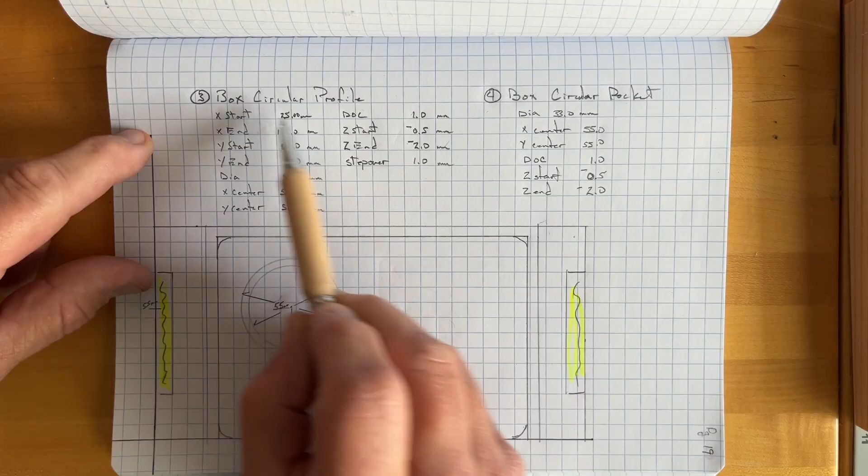All right, so we've knocked out a few things. We've done our profile all the way around it, and we've done our circular pocket. Now what we need to do is work on our rectangular pocket.

So we're going to set this up at 50 millimeters across, right? Our set point or center point will be at 115 mils and at 51 mils up, so it's just a little bit lower in terms of center.

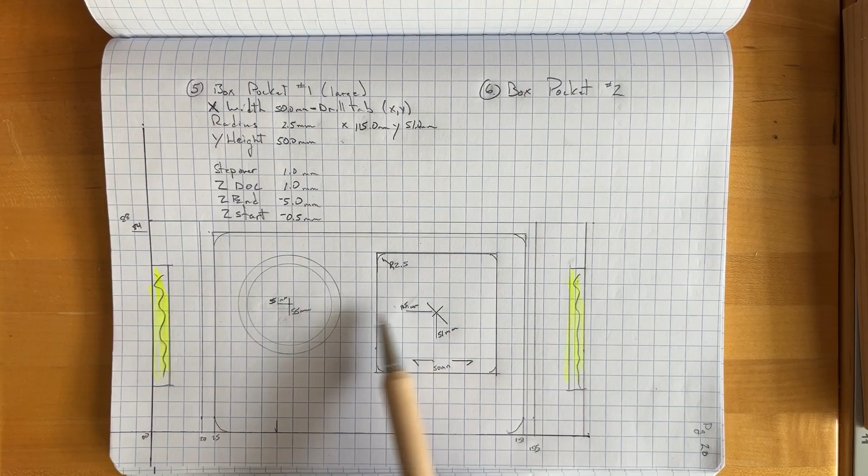All right, so here's all our specific details. We're going to do the same thing, however we're going to run this deeper at -5 millimeters into it, just a little bit deeper pocket there, to make sure that we're able to do things. We're going to have radius corners at 2.5 mil.

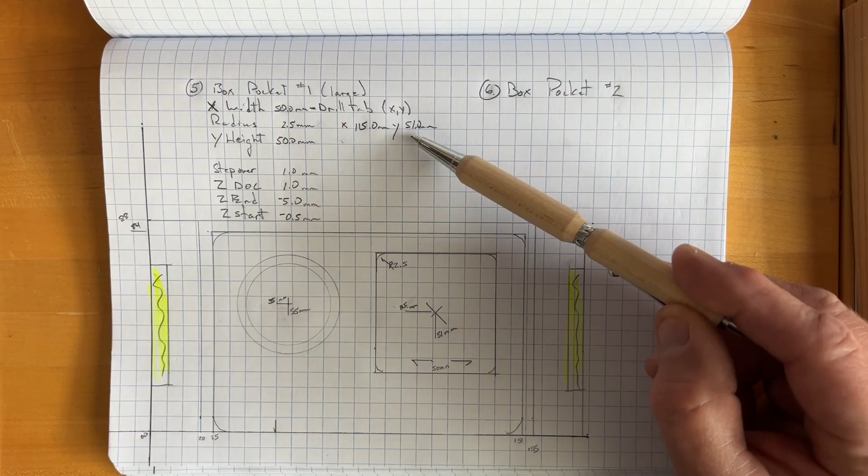All right, so let's go ahead and enter in this data. We're going to again use the drill tab in order to set this up, so 115 and 51 mils. Let's get to PathPilot and put that together.

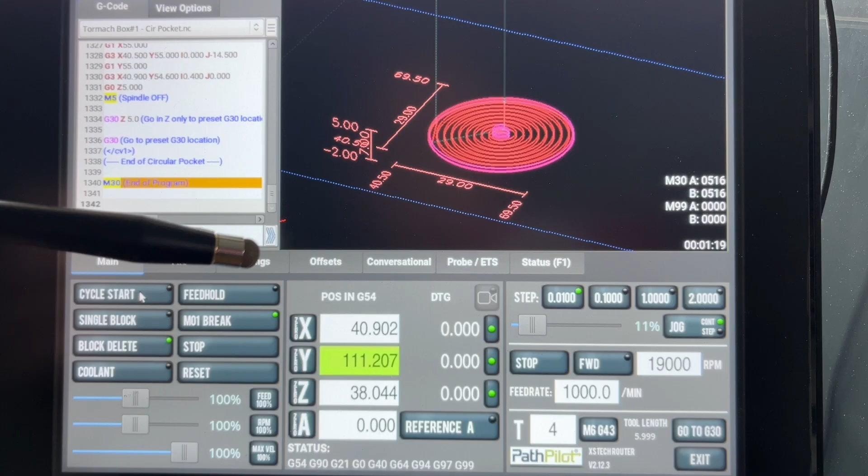All right, this shows that we just finished up our circular pocket. Let's go into conversational, and we need to make sure that we've got our pocket, but this time it's going to be rectangular. Now let's go ahead and set things up.

I'm just going to go ahead and do my step over at 1, actually 1.5, because that seemed to be working pretty well for us. We're going to keep all of these data points over here.

Let's go ahead and change this to our Tormach box, number 1, and this is our rectangular pocket. Okay, fantastic. Hit enter, make sure that it's saved.

And on our width, we've got this at 50 millimeters and our 50 millimeters, because remember, it's going from the center. Our radius, we've got that at 2.5 millimeters.

Our Z start, we can go ahead and actually do this lower because we'll be cutting air if we are at -0.5. So this is actually at a -2, if you remember, that's where we left off on our profiling for the circle.

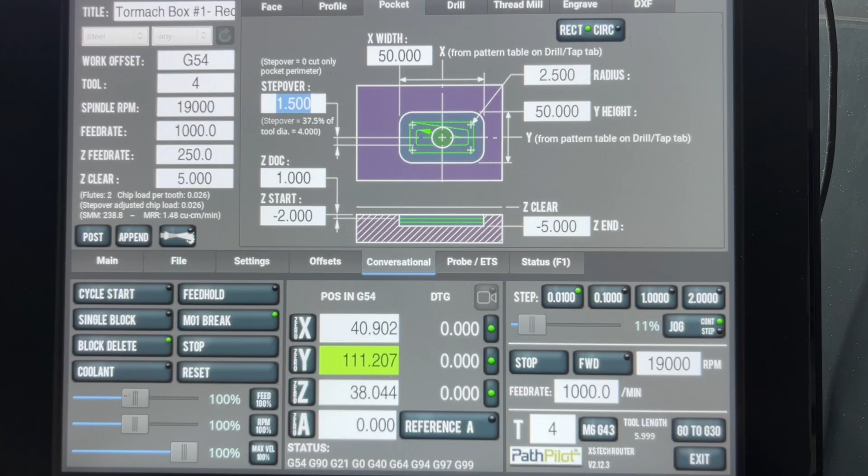Our clearance or Z, we want that in terms of a Z end at -5. And depth of cut, we only want that at a depth of cut, let's go 1 millimeter as well. And if we find that the material is softer, we can always do that a little bit different.

So we've got our settings here. Now we're going to go to our drill tab and we need to change this. Our X is 115 millimeters over.

Whoops, let's go back in here. Let's change that. So if you haven't clicked on a box, whatever you start typing is where it's going to go. So let's open this box: 115 millimeters, good, enter, and we're going to be 51 millimeters in terms of Y high.

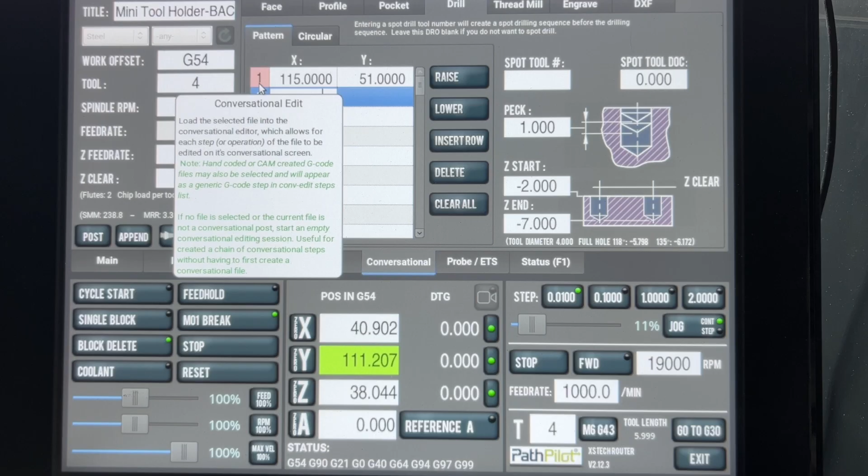Double check my data, that all looks great. Again, I don't need to pay attention to anything off to the side, it's just going to disregard that. This is what is most important.

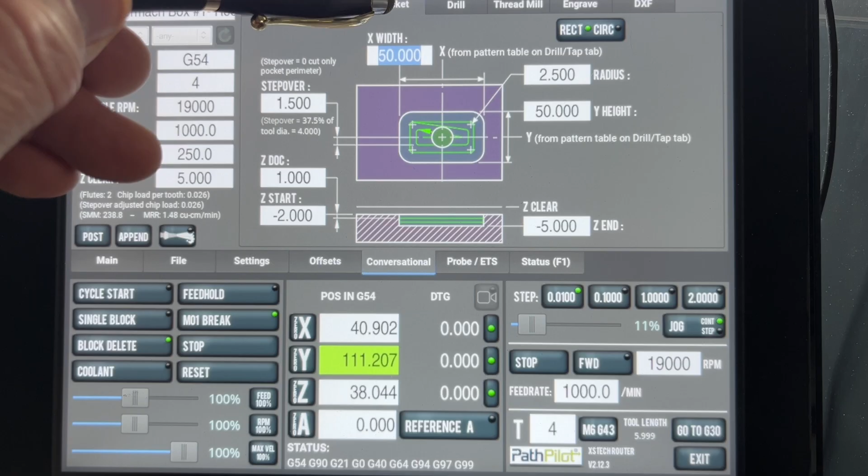However, please remember, we need to go back to our pocket tab in order to post and do this save. Let's see if we get any error messages. So again, rectangular pocket, and it looks like everything is set to do well.

So we're ready to run this. Again, if I'm a little nervous, I'll slide my feed over so it's a little bit slower, and then I can work on my set. So let's go ahead and close the lid and get started.

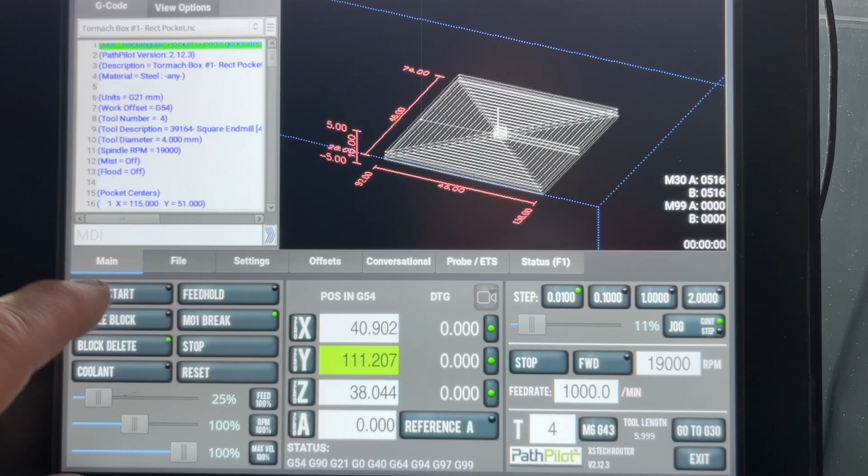Things look good in terms of where that center is starting. I'm going to go ahead and ramp this up.

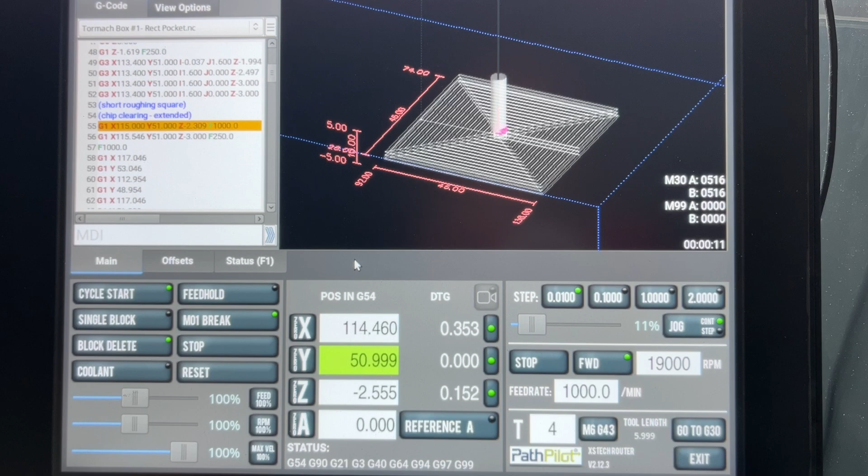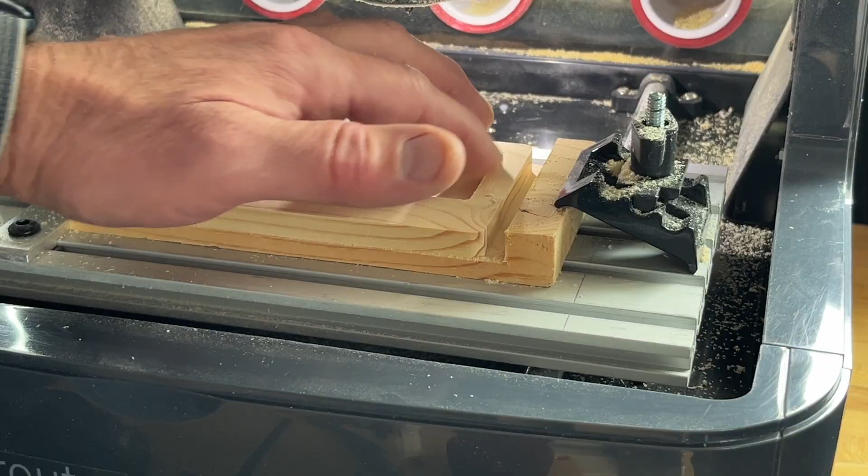Well, let's take a look at this. Again, we can come back and work on that fuzz a little bit, but we've got a decent depth here.

Now remember, that's 5 millimeters down from the original height. So if we want this actually to go deeper, we can do that, but I don't think we need to hog out that much material.

So that'll be perfect for any kind of engraving that we're going to eventually put there and some of the other work that we need to do.

So I just did this pocket. I'm going to create a couple of smaller pockets just to be able to do that, and then we'll go into our drill pattern next. So let me do these two little pockets over here, and then we'll move forward.